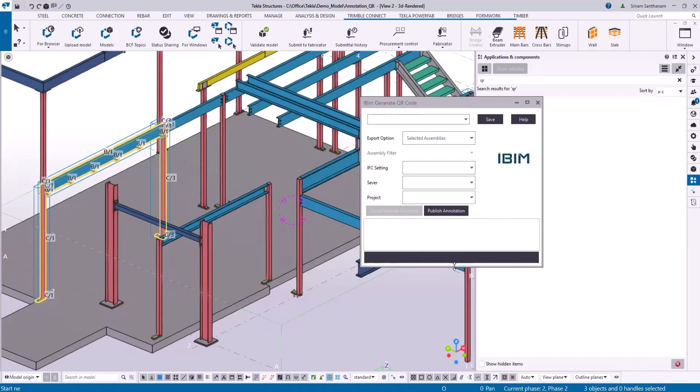Hi everyone, in this video, I'm going to give you the demo of this application IBim Generate QR Code. This application can publish drawing annotations into Trimble Connect and it will create a shared link for the QR code and add the QR code to your assembly drawing and cast unit drawings.

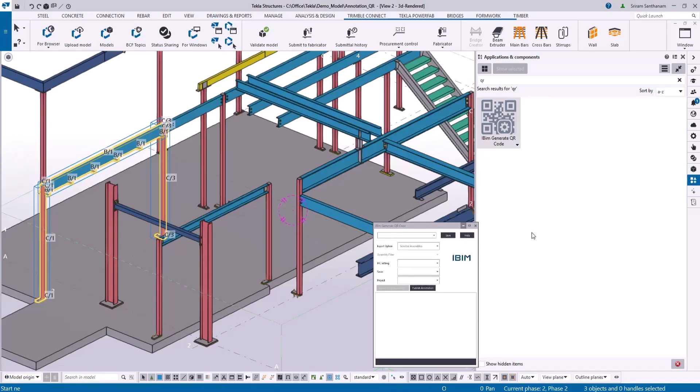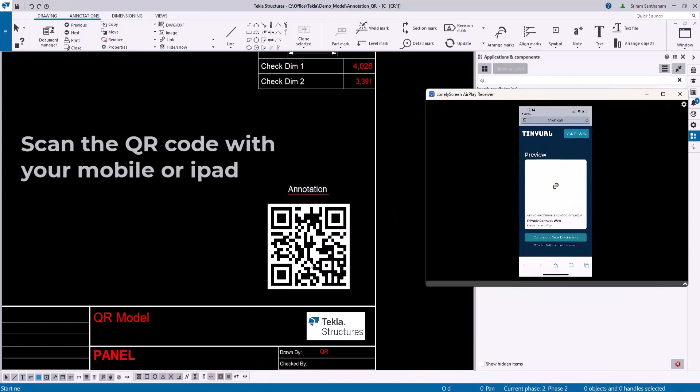Before I run this application, let me show you the final output. I'm just opening the cast unit drawing. I'm going to scan this QR code with my mobile and continue to your destination. Click this cloud symbol at the bottom. This particular drawing has three views. You can see this trowel face reinforcement and the section AA. That's what it shows here. When you rotate, you can see the member.

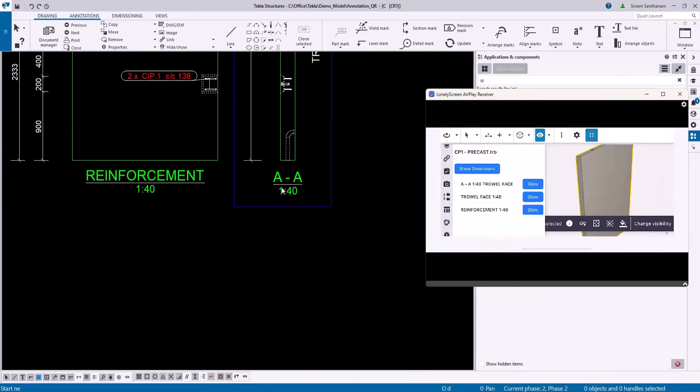To display the dimension, click Show Dimensions. And if you want to hide any particular view dimension, you can press hide, so that will automatically hide the dimensions. Let me just click this cloud symbol one more time, hide the side window. Here you can see the dimensions and drawing annotations.

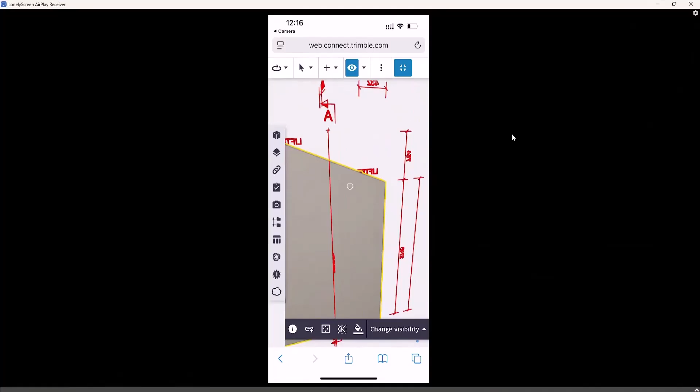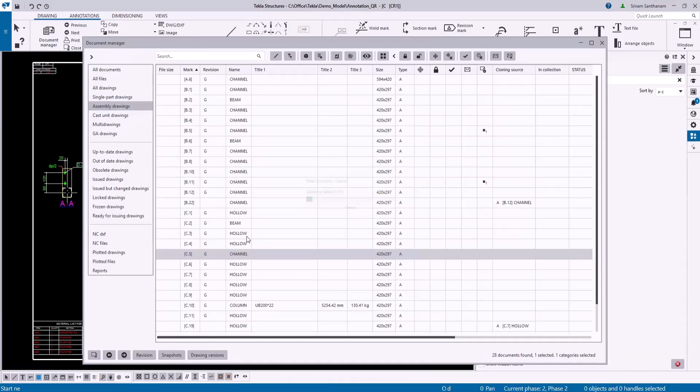I'm going to scan another drawing. Let me take this C5. It shows the top view, front view, bottom view, and section AA and section BB. Let me rotate, and you can see the column. To display the dimensions only for the top view, let me just press top. You can see the top view dimensions. And if I press the front view, it will show the front view and section dimensions.

Let me press show dimensions here so that it will display the dimensions of all the views. And to make it even better, let me press this cloud symbol one more time, and now you can see. If you know how to add dimensions in Trimble Connect, you can also measure the distance. Purposely, I deleted the dimensions between the bolts.

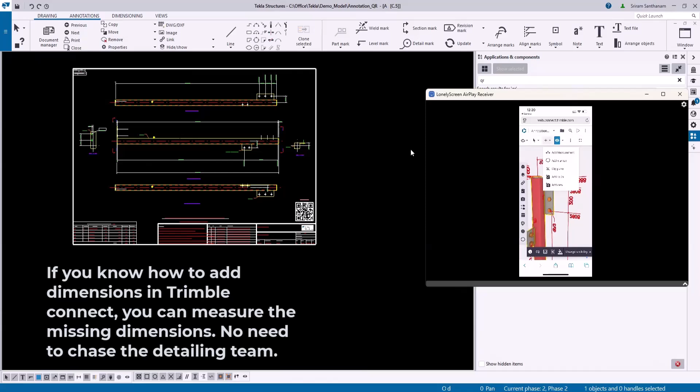So let me just select the plus sign, add measurement. I'm going to pick the center point of this bolt and the center point of the first bolt. So it shows the distance 100. When I just go to Tekla, you can see the dimension is 100.

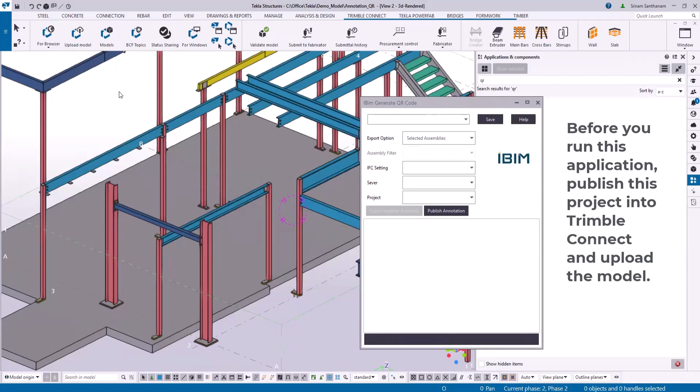Let me show you how this application works. Before you run this application, you have to publish this model into Trimble Connect and then upload the model. Let me just open the browser. You can see the Tekla model here and the drawing annotations. So here is the application.

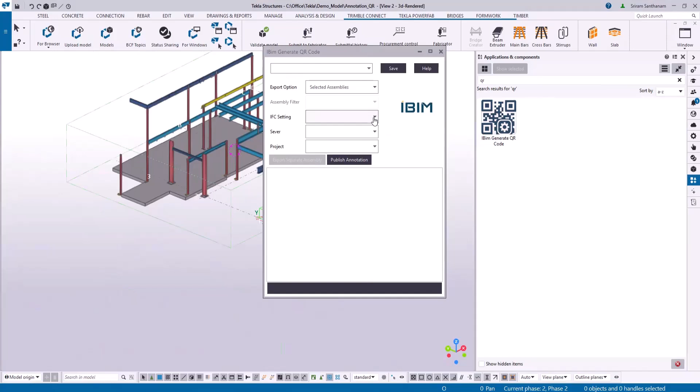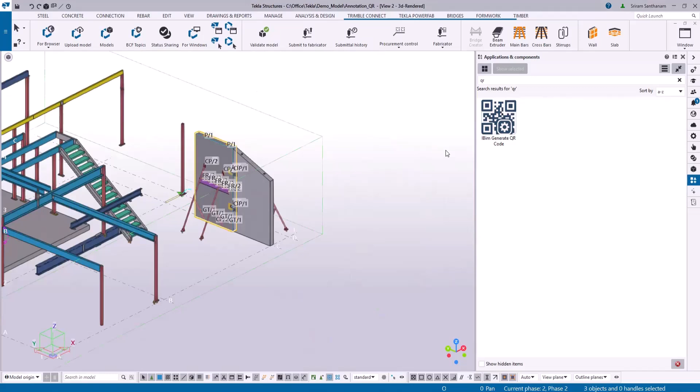You have two options. You can choose selected assemblies or selection filter. Let me choose selected assemblies. I have chosen Australia when I published this model into Trimble Connect. It will automatically load all the Trimble projects once you select the server, and then select this project, switch to selected assemblies. In the interest of time, I'm going to pick only these two assemblies and this cast unit. And before you run it, you have to keep the document manager open.

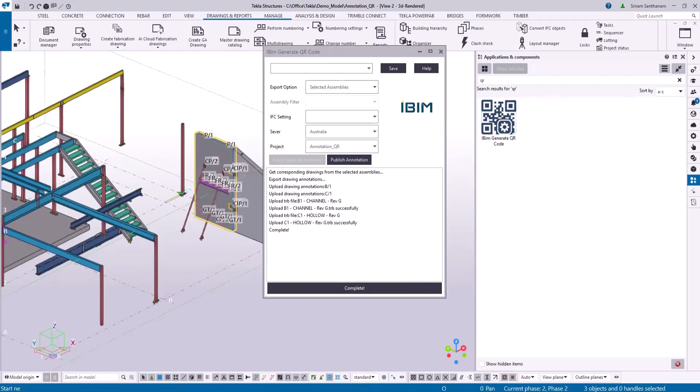So let me just go to the document manager. I'll move this to the next screen and publish annotation. So the process is complete. Let me just go to Trimble Connect, drawing annotations. So this is CP2 and this one is C1 and B1. You can see the CP2 here and B1 and C1. It might take a little bit of time to upload this drawing annotation, so I would say give at least 5 to 10 minutes.

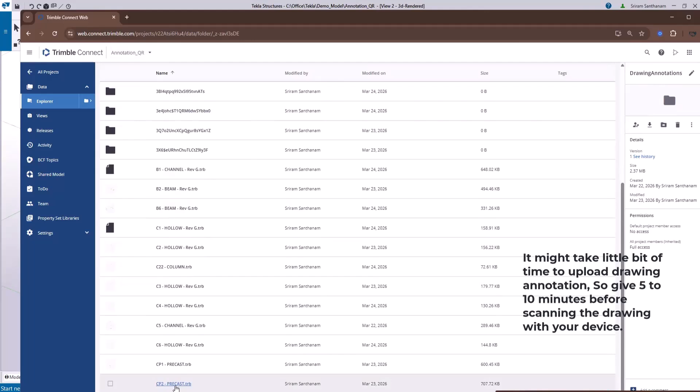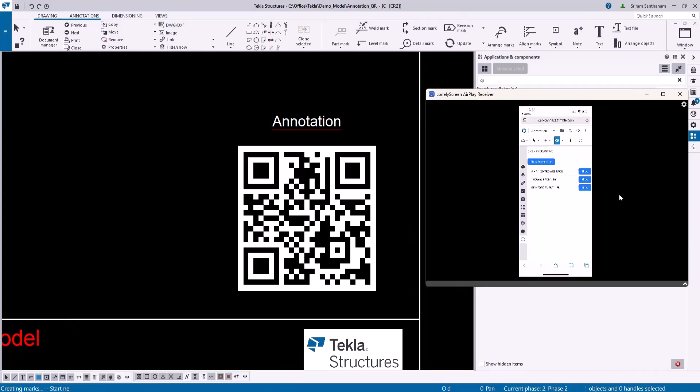If I go to the cast unit drawing and I'm opening the CP2, let me just scan this cast unit drawing and continue to your destination. So you can see it shows the three views. Show dimension. You can see the dimensions with annotations. So just imagine how much this is going to help you in the fabrication shop.